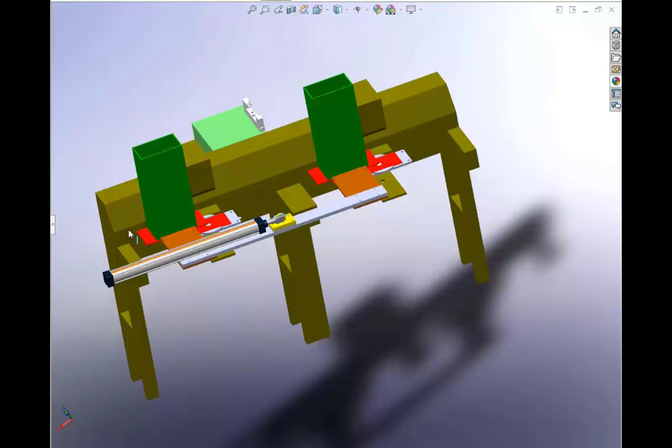What we have got here is the second version of the conceptual design. In this configuration we have two stapling machines side by side. Everything is being duplicated except the pneumatic cylinder and the pneumatic valve. So here it is somehow similar to the previous design.

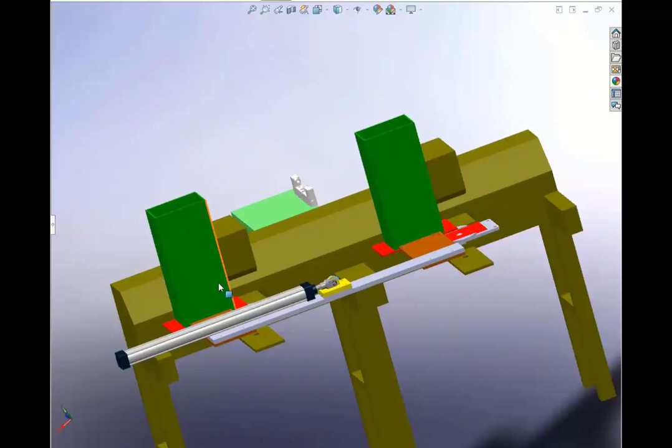You have two cartridges which are holding the masks stacked vertically. Underneath, these are the suction plates which are pulling one mask at a time. Once the mask is collected inside the suction plate, the cylinder is being operated by the electronic box,

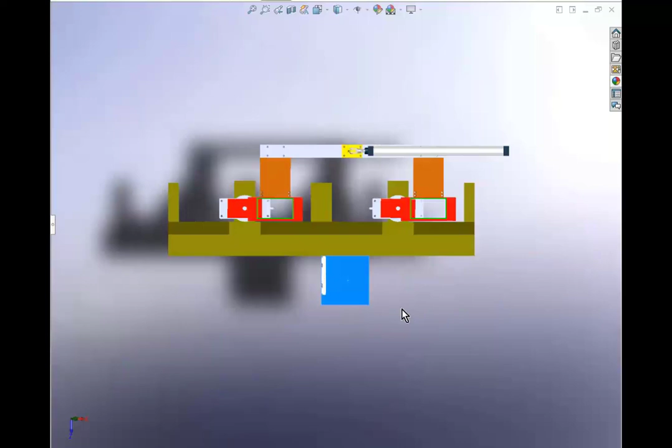and if you watch this from the top, that cylinder, when it moves to the left, it's bringing two masks together at a certain position where the mask is free to drop from an existing cavity. So it is gravity assisted movement of the mask. It's falling on top of a rotary plate.

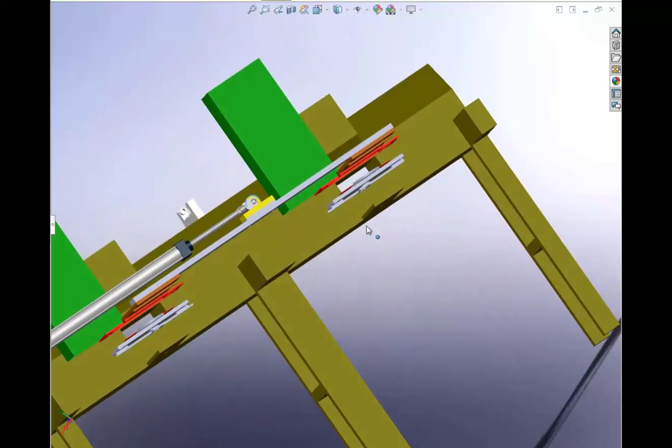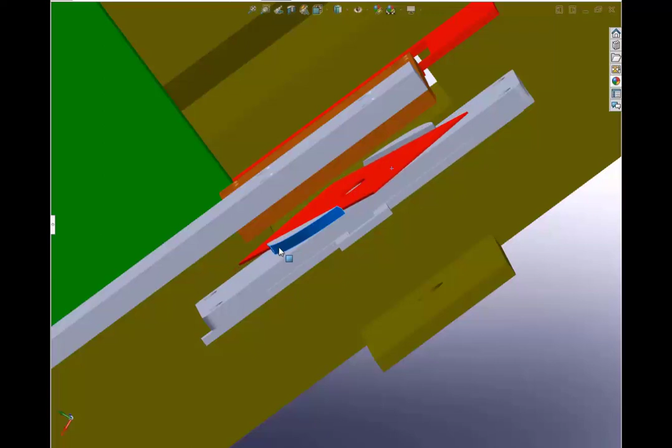So that red rotary plate is sitting on top of a Scotch yoke system. So that Scotch yoke system converts the linear motion to rotational, and what it does is it rotates the mask 180 degrees such that at a time each end is exactly positioned inside the stapling window, and the elastic band is ultrasonically welded to that end.

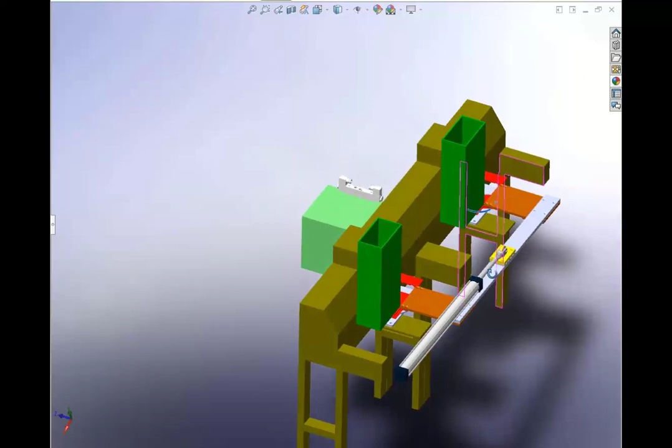So once one end is finished, the other end is done, and then we'll have the masks completed, the welding completed. So by the suction, the completed mask is moved from the position and dropped inside the basket underneath the welding machines. So as you can see, two rotary systems are identical.

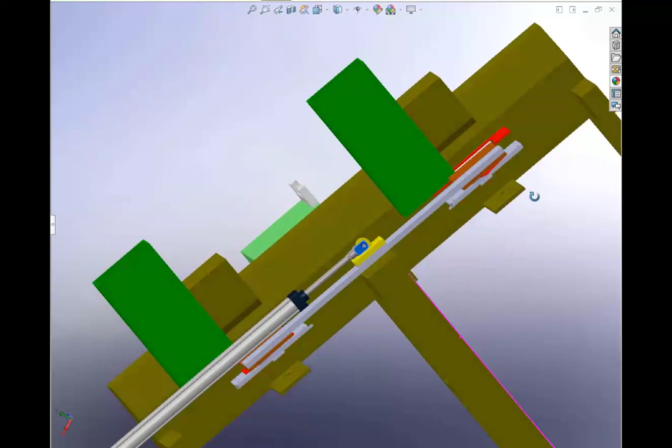So in each stroke we have two masks collected, moved to the welding positions, and then the rotary system will let the mask have the elastic band welded at each side, and then with the action of suction, the completed mask is taken away from the position and dropped inside a basket.

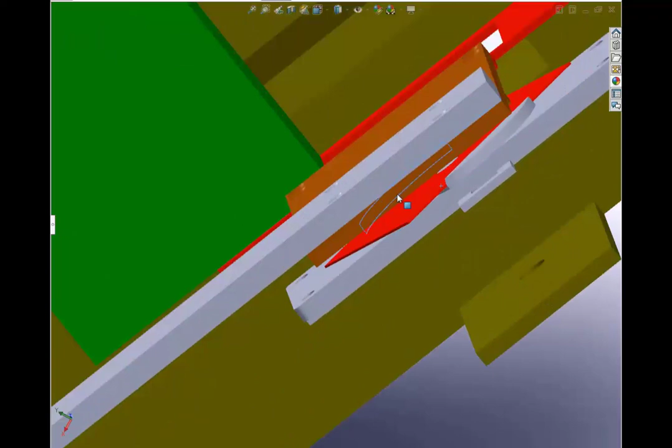So this is the conceptual design. Still we can add detail or make modifications.